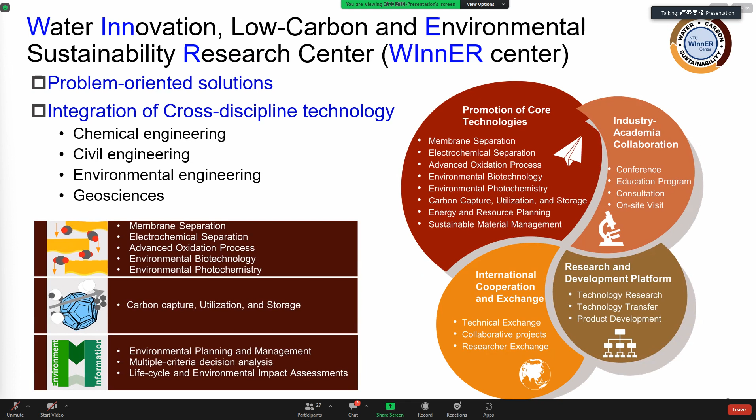So we focus on problem-oriented thinking, and we try to understand the wastewater treatment issues and challenges from local companies in Taiwan. Then we can provide integrated solutions to them.

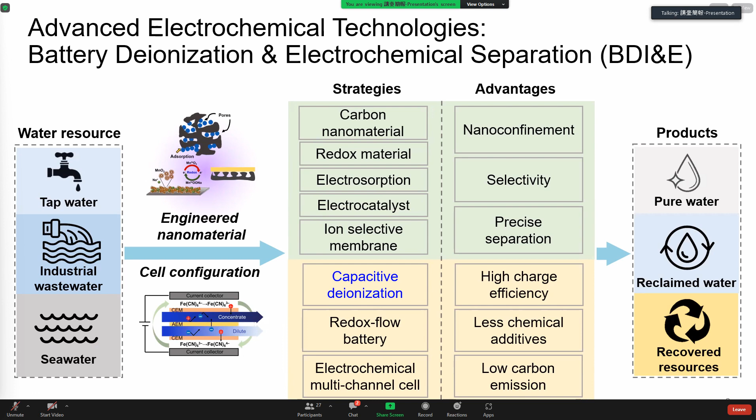I have been following Professor Hou's dedication to the promotion and development of CDI technologies, so I will focus on MCDI technologies today. I also know much about MCDI.

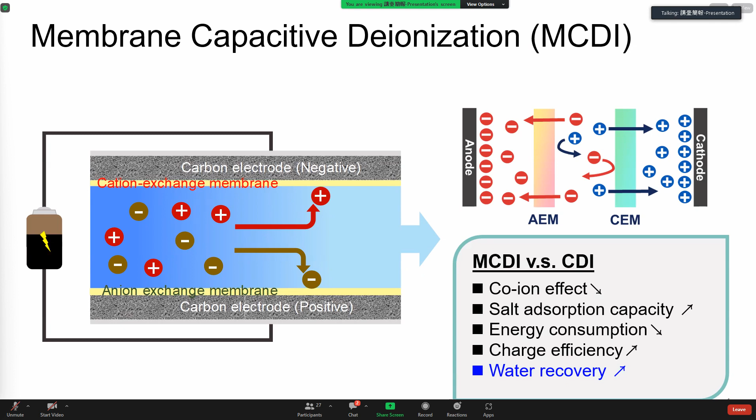Due to its superior characteristics, MCDI has a lower co-ion effect, low energy consumption, higher salt adsorption capacity and charge efficiency. And most importantly for me, MCDI has a higher water recovery than CDI.

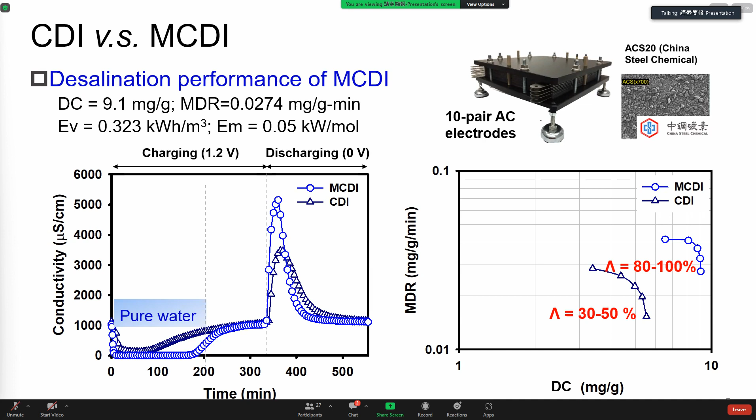So I think most CDI manufacturers worldwide focus on commercializing MCDI devices and controlling systems.

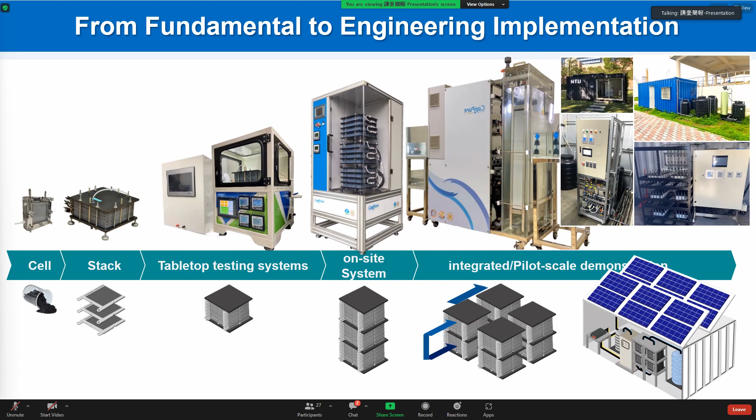For our laboratory, we gradually progressed from fundamental research to practical engineering and implementation. We started from a very tiny electrode and scaled up the electrode surface to one bigger than my face. We developed a small cell into a stack, developed tabletop testing systems, on-site systems, and an integrated pilot scale plant. We also published some patent documents in Taiwan.

To summarize the most important aspect over these years, with the competition from mature technologies such as ED and RO, I think the most important task for us is to find a suitable target and niche practical application for MCDI.

Besides technical feasibility, we have to make sure the entire wastewater treatment process we provide to the company is economically viable for the technology to transition from the laboratory to practical applications.

So in the past, we talked about seawater and brackish water desalination and water softening. Maybe we can reach enrichment and carbon capture, even lithium mining, in the near future. Today I'm going to talk about reclamation, circular water treatment, and wastewater treatment using MCDI.

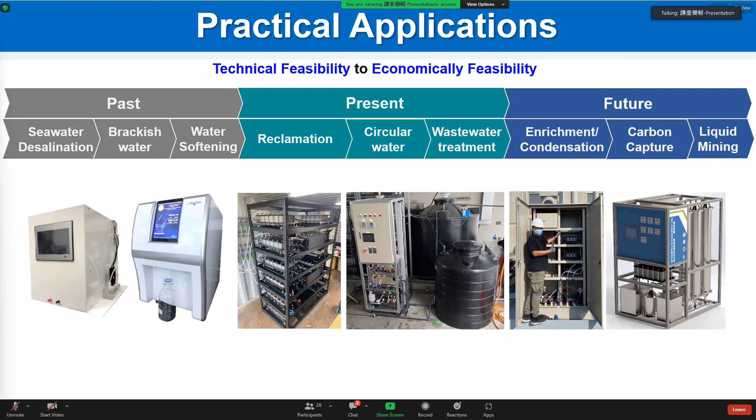So I will talk about reclaimed water from domestic wastewater treatment plants and from RO reject. We also do water quality control of the circulating water in a scrubbing tower.

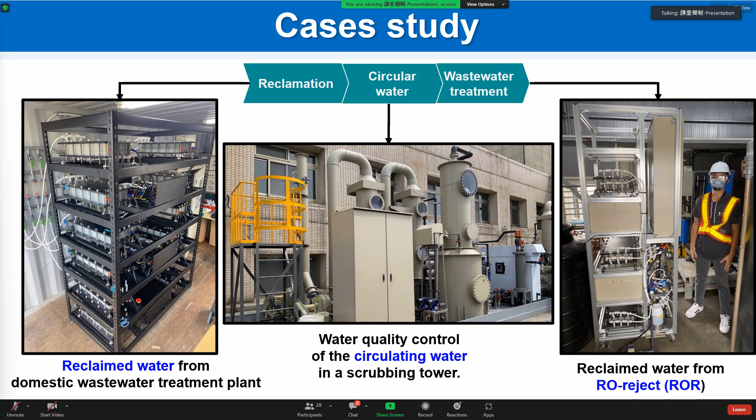So the first case involves the establishment of an advanced MCDI pilot plant. We reclaim the effluent from the wastewater treatment plant, and we utilize sand filtration and ultrafiltration to remove most of the suspended solids. Then we utilize the MCDI system to remove the charged ions.

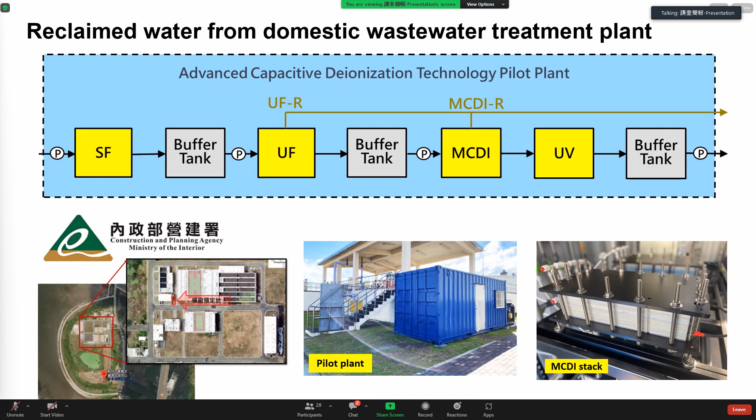The total capacity of the MCDI system is around 20 cubic meters per day, and we use a constant voltage of 2 volts to power the MCDI device.

As you can see, the conductivity of the MCDI outlet decreases gradually during the charging stage. To achieve a higher water recovery, higher than 75%, a pump-off regeneration process is applied as the operation process.

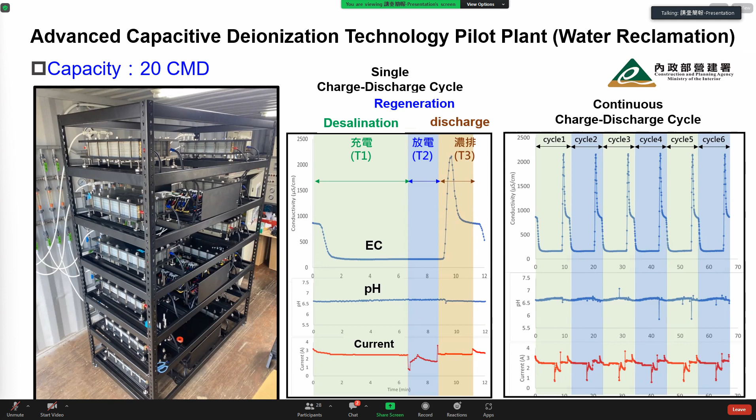And lastly, the conductivity of the MCDI outlet increases quickly during the discharge process. So it's a normal charging and discharging cycle for MCDI, and we can set the time for each stage using this control interface in the controlling system.

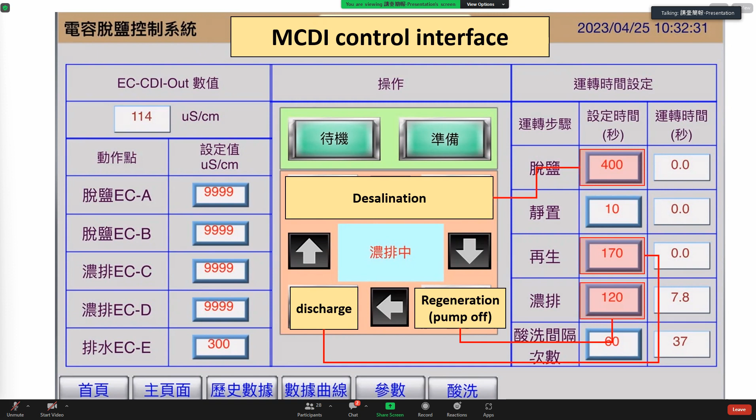The results show that the MCDI system has long-term stability among 8 months of continuous operation. We have an average removal efficiency of 75%, and the energy consumption of the MCDI module is around 0.2 to 0.4 kilowatt-hours per cubic meter.

Importantly, the energy consumption is only for the MCDI module. If we take into account the whole system, including the pump and the MCDI module, the energy consumption is around 1.7 kilowatt-hour per cubic meter. So the major energy consumption comes from the pump in our case. I think it's a result of a high water pressure drop inside the MCDI module, so it seems we still have room for improvement in the MCDI structure design.

However, we also compared the energy consumption with the same capacity RO system of 20 cubic meters per day. We found the energy consumption of the entire MCDI system is still lower than the RO system.

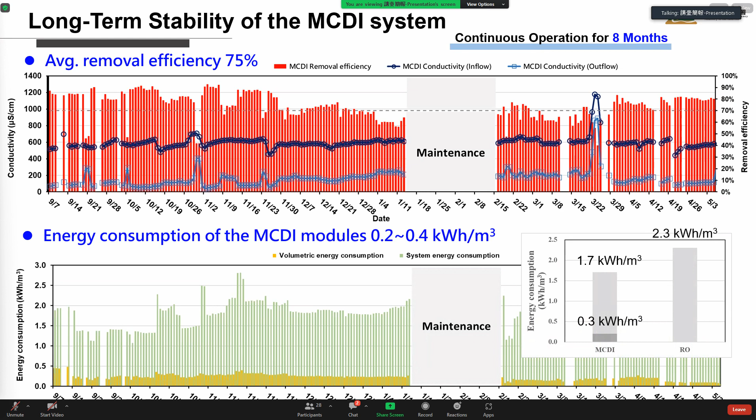As we can see, the removal efficiency decreased from 90% to about 65%. I think it's a result of some scaling problem on the electrode surface. So we increased the cleaning frequency of the electrode surface using citric acid, and then we noticed the removal efficiency increase back to 85%. So it works.

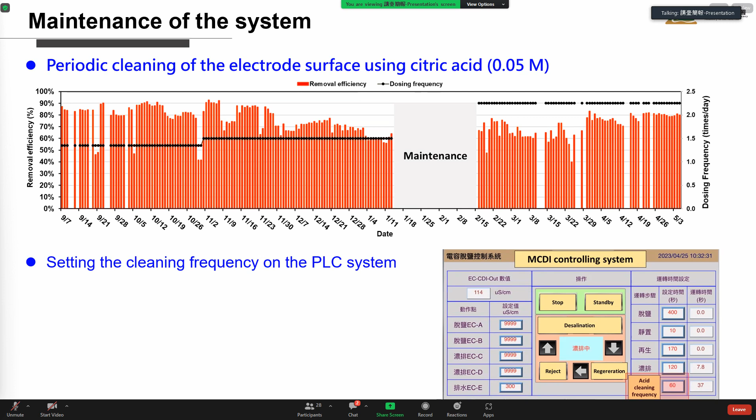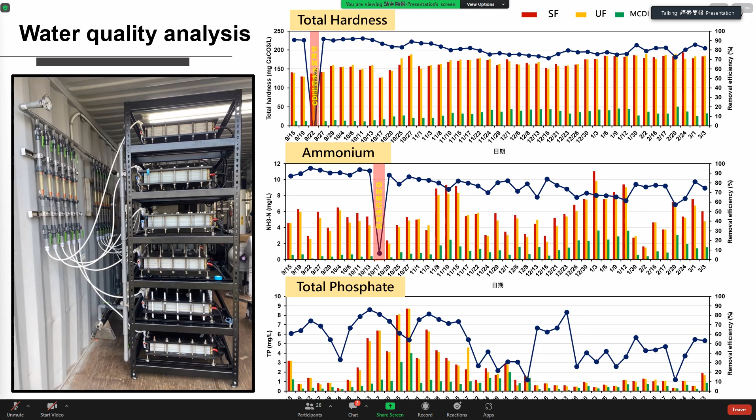According to the water quality analysis, we found the removal efficiency of charged ions like total hardness, ammonium, and total phosphate is good. But for uncharged species like COD or TOC, there is no significant removal efficiency observed from our results.

So it looks like we need a post-treatment unit to meet the specific water quality standards.

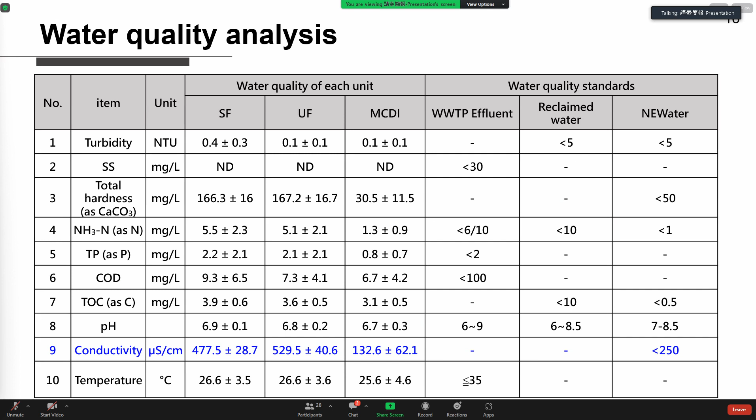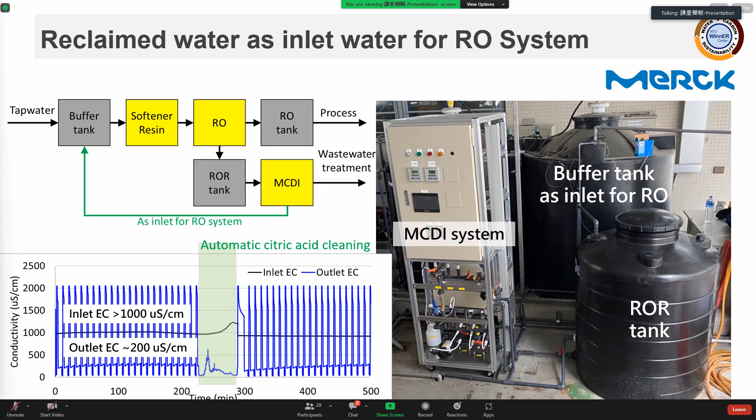So by using the MCDI system in the purification system, we can increase the water recovery from 50% to 77%, with a water saving ratio of around 35% in this case.

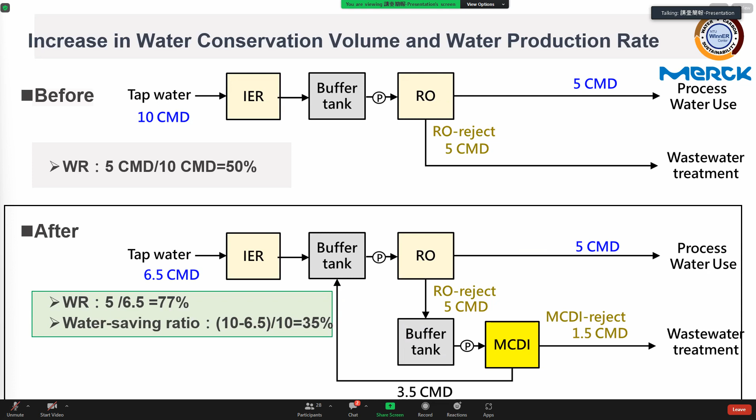For this company, we provided two systems. For one system, the produced water from MCDI was used as inlet for the cooling tower, another application for the produced water from MCDI.

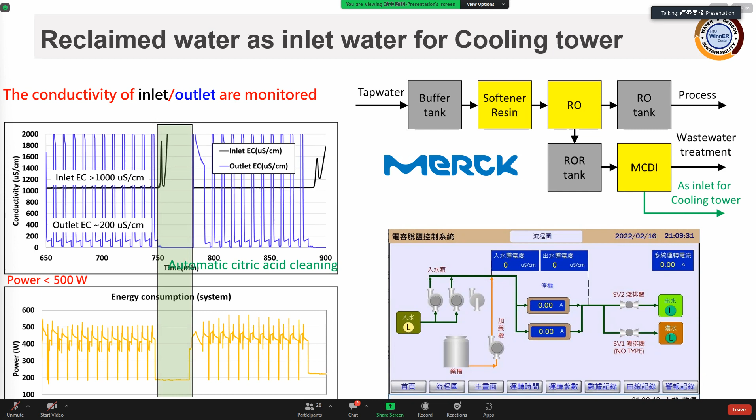These are the on-site photos. We can adjust the number of MCDI modules to obtain different capacity: 2 pieces for 4 CMD and 3 pieces for 6 CMD. In this case, we also operated the modules at a constant voltage of 2 volts.

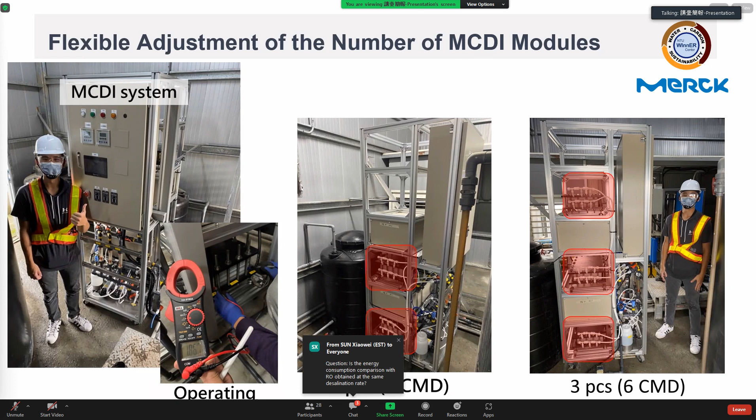The last case is about the water quality control of circulating water in the scrubber. The scrubber is primarily used in industry to convert pollutants from air pollutants to liquid pollutants.

As more and more contaminant is absorbed from the air into the liquid, the conductivity of the circulating water increases gradually. To prevent the conductivity of the circulating liquid from becoming too high, which may result in poor mass transfer from the air to the liquid, continuous water supplementation and discharge of high concentration wastewater are required.

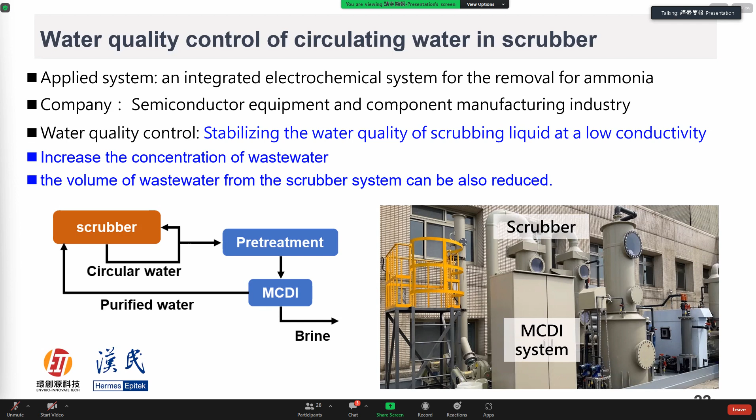So I was thinking maybe I can use the MCDI system to produce a high concentration, low volume brine and reject from the whole scrubber system. MCDI can produce purified water back to the scrubber and dilute the circulating water, so I can stabilize the water quality of the scrubbing liquid at a low conductivity.

The case I'm going to talk about has a system with 2 scrubbers. The first scrubber is connected with the electro-oxidative system for the removal of ammonia. It transforms ammonia to nitrogen using electrochemical technologies, but I'm not going to go into the detail of this part.

We can see the second scrubber here. The second scrubber is connected with the MCDI system, so the purified water can go back to the scrubber, and high concentrate brine can be rejected from the entire scrubber system.

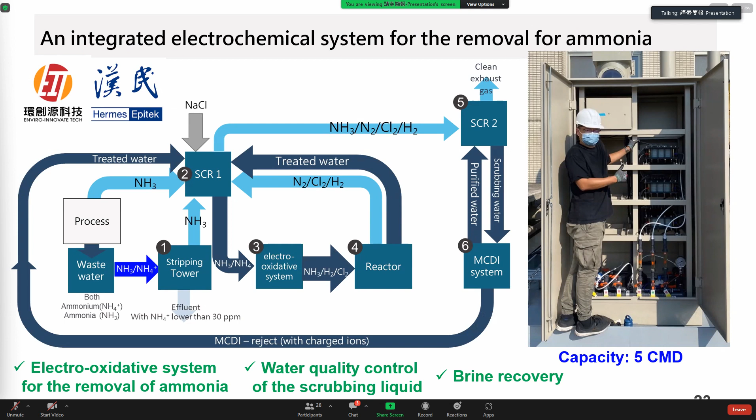Now, as we can see, yes, it works because a brine with a higher concentration can be produced from the MCDI, higher than the original conductivity of the circulating liquid. So I produce a brine with a high concentration, and the conductivity of the circulating liquid decreases gradually to reach a stable water quality in the whole circulating system.

But we also found a problem: when the conductivity of the circulating water decreased to a certain level, the concentration efficiency made by MCDI is reduced when the conductivity of the circulating water is low.

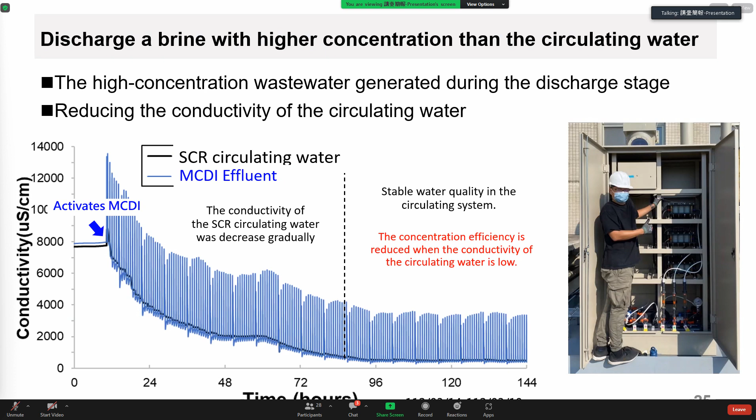So I modified the controlling system of the MCDI. The MCDI system only automatically activates when the conductivity reaches 2,000 microsiemens per centimeter, and automatically stops when the conductivity decreases to 1,500 microsiemens per centimeter.

As the data shows, because pollutants go from the air into the liquid, the conductivity increases gradually. When it reaches 2,000, the MCDI system is activated, so the conductivity of the circulating liquid decreases again and stops at 1,500 microsiemens per centimeter. So I can use this system to control the conductivity within the range we set on the system.

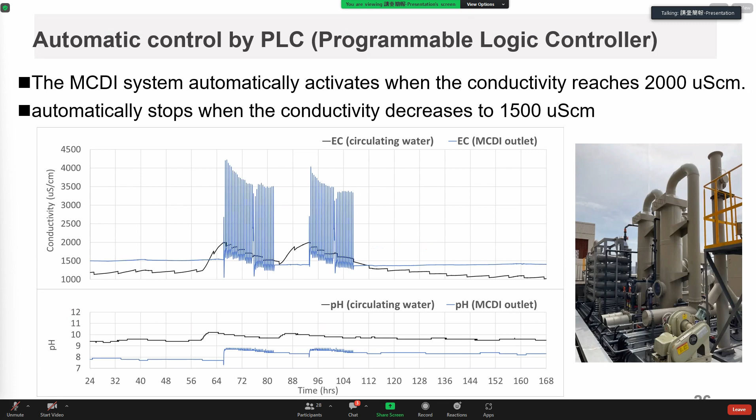I want to thank Wen-Ching Huang, who is a general manager, Tsung-Yi Tsai, an engineer, and Yan-Ting Ke, another engineer, for helping me and our team establish the system.

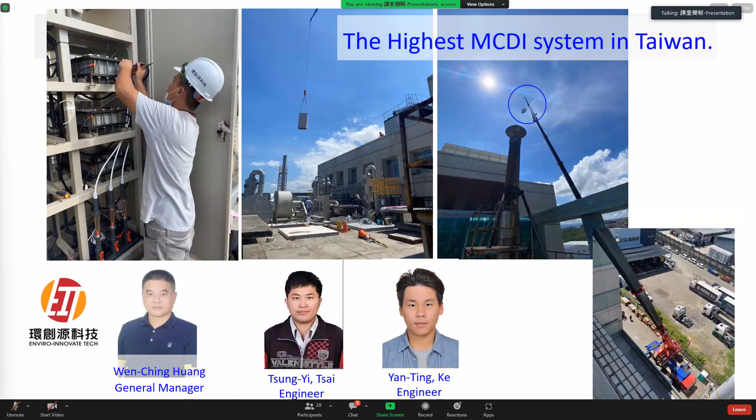At that time, these are photos of us doing the installation and hand-in process. I was unsure about the MCDI performance, how it would go, but I was sure that it's the highest MCDI system ever in Taiwan. It's very high. Okay, so let's go into the conclusions.

As I mentioned before, we discussed the technical feasibility in the laboratory, talking about removal efficiency and water recovery. But the challenge we face is about economic feasibility. For the second case and the last case, I didn't mention many indicators about economic feasibility because we're still working on it. I hope I have the chance to share the data in the near future with all of you. Thank you.

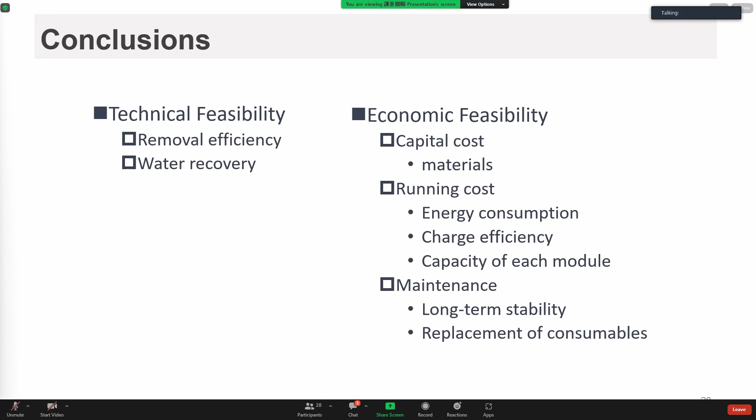Well, first of all, it's very interesting to see that you not only have the 101 tower, but also the 101 CDI system. But I'm very pleased to see that you do this pilot work, because as David Wade was saying the other day, we need more of these pilot studies. So it's very nice that you actually do this.

Thank you. I do have two questions. The first one is on the housing. You have chosen a rectangular housing with iron plates or steel plates, which makes it very expensive. You must have ideas to actually move to other housing.

And the second question, let me ask it immediately: almost everyone who does pilot studies would actually do that at constant current. You've chosen constant voltage, and that may be the reason why you find this decay in performance, because of scaling. So what was the rationale for going with constant voltage?

The first question is about the housing, right? Yes, because we did it in the laboratory, so far we want to do the design of the housing, but we have not yet finished it.

And for the second question, it's about using constant voltage. I think if I use constant voltage, we have a much higher driving force from the beginning, so I can have a much higher mean adsorption rate for the entire charging stage. If I use a constant current, the voltage increases gradually, so I think it costs more time to achieve the purpose of desalination.